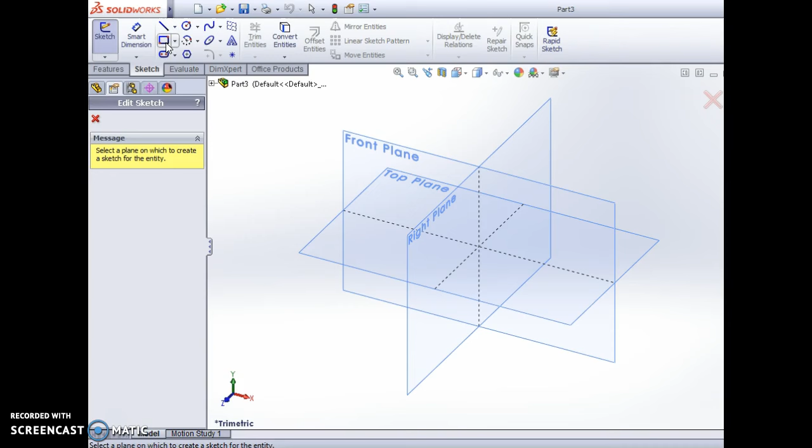So I start off in exactly the same way as I did in the first lesson. I go to Sketch, I pick a basic shape. Again, I'm going to use a rectangle for this, and I'm going to start off in the top plane. I'm going to draw the rectangle from the origin point, just making it any size, because now I'm going to go up to this tool here.

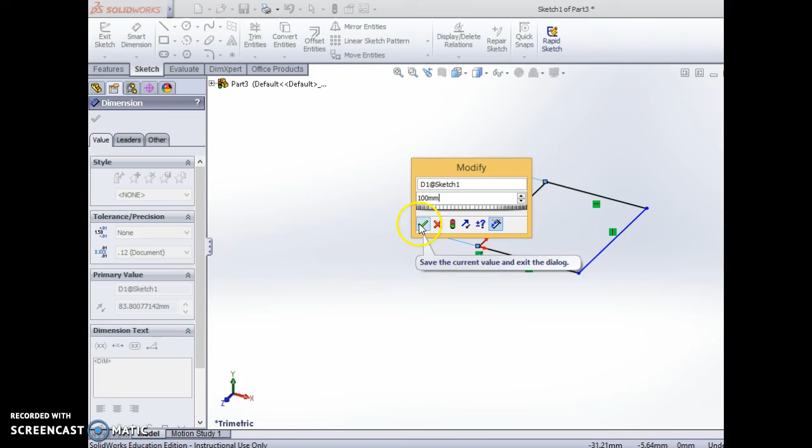This is the Smart Dimension tool. I'm going to click here, click on this line, and drag it across. As soon as I've done that, this dialog box will appear with the actual measurement I've drawn, and I'm just going to change that to 100 millimeters. There's a green tick, so I must click it before any changes are made, and you'll see the shape has increased in length so that it's now exactly 100 millimeters.

I'm going to do exactly the same thing to the bottom line. I'm going to take this along, press on it, pull it down. You can see from that number it's much shorter than the upper line. I click there, the dialog box appears, and I'm going to change that to 100 and click on the tick.

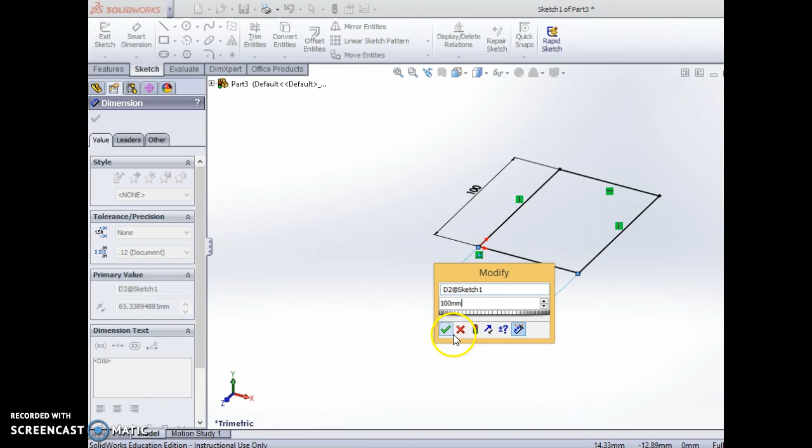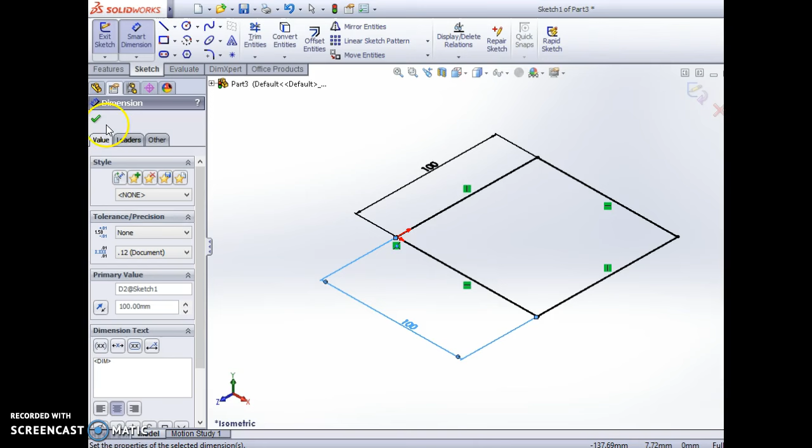So that's now a perfect square. It doesn't look like a perfect square in this view, but if I press Control 8, you can see that's absolutely fine. Press Control 7 again, and now I can just click on the tick to say I've finished with the dimensions.

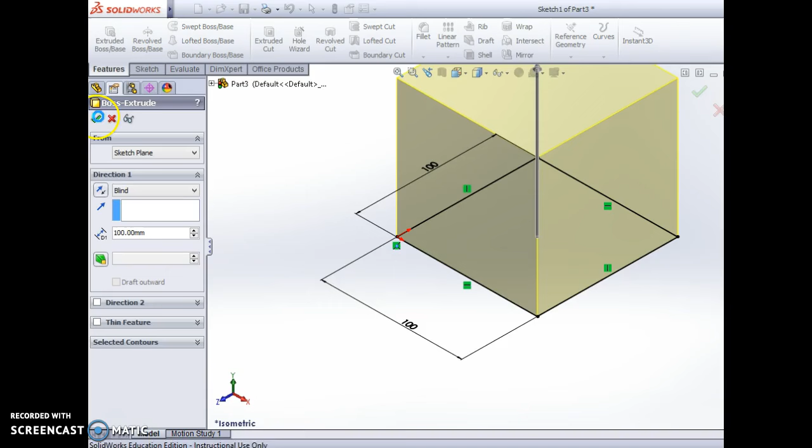Once I've done that, I can go back into Features, extrude the boss base, and again, if we're going to do a perfect cube, I've got to enter in 100. Press the green tick, and that will give me a perfect cube shape.

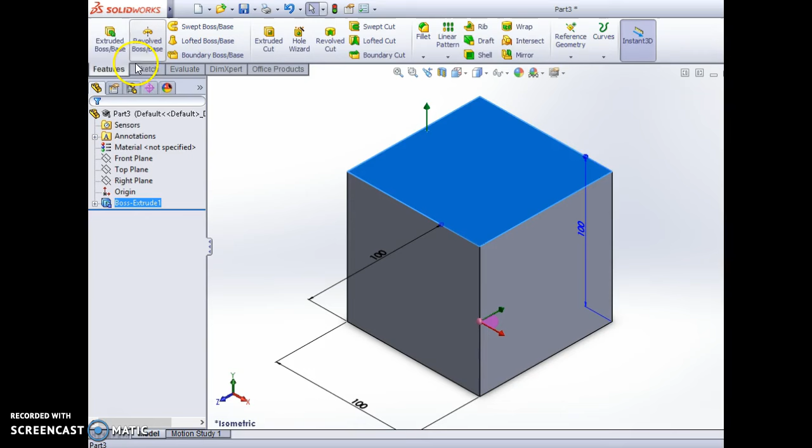Now I'm going to use the same Smart Dimension tool, but to position a shape. So I click on the top of the box, creating my work plane. I go through to Sketch, click on the rectangle tool again. To make my life a little easier, I press Control 8 to view onto the work plane, and I'll just sketch a rectangle at any size.

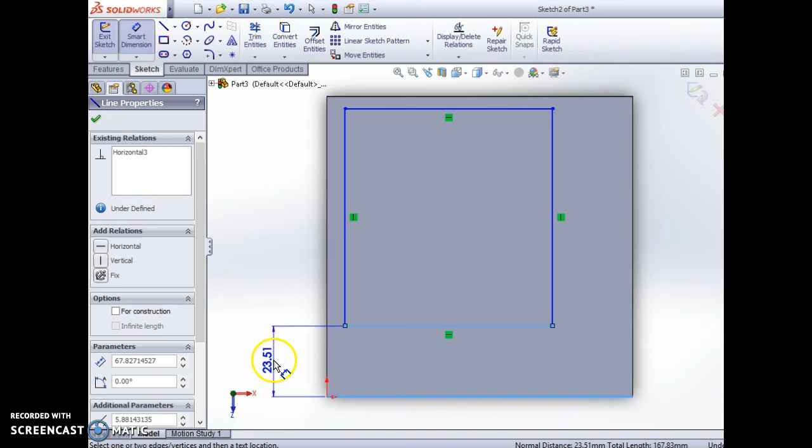I actually want this to fit nicely in the center, with a 10 millimeter gap, but I'm not even close with my sketching. This doesn't matter though, because I can put my dimensions on using the Smart Dimension tool. This time I click on the outside line of the first cube once, then the outside line of the second square once, which gives me the distance between those two lines, and I'm going to need to change that to 10 millimeters.

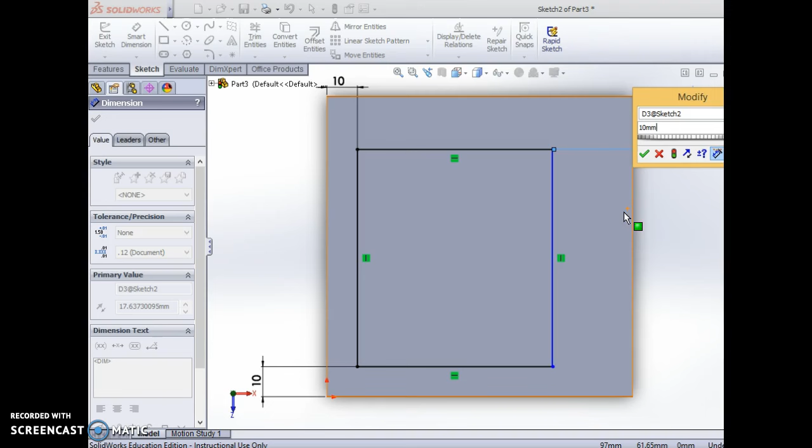Don't forget to click the tick when it appears. I'm going to repeat that process four times, and once I'm happy, I'll click on the green tick.

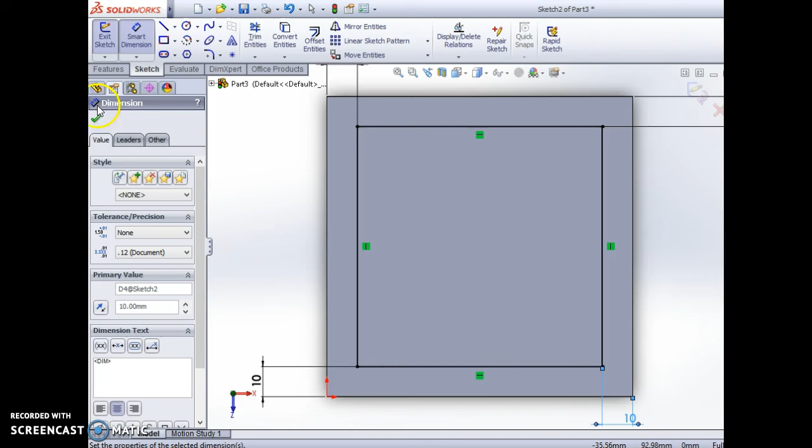I'm going to move it back into a 3-dimensional view, and now I can just repeat using the Features tool, and use the Extrude Boss base.

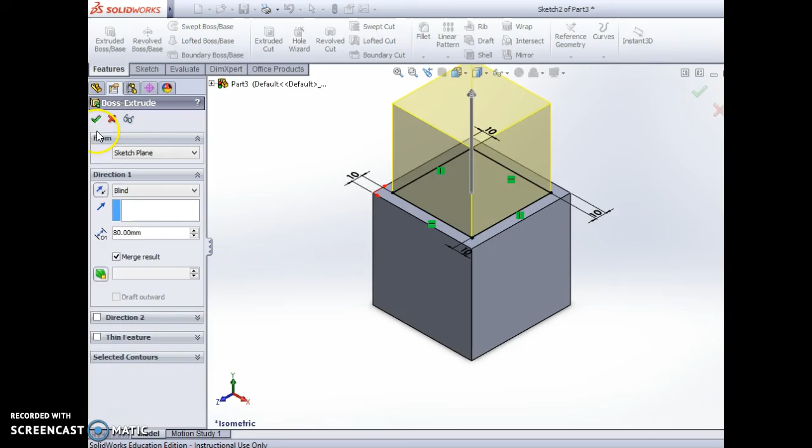This time I need to adjust the height to 90 millimeters because I'm looking for a cube. Actually, I made a mistake there because I've taken two lots of 10 off, so I actually need to change the height to 80 millimeters and click on the tick, and then I'll end up with a perfect cube on top of a perfect cube.

I can then repeat that process over and over again until I build a tower, or I can come out with the sides just like we did in the first cube.